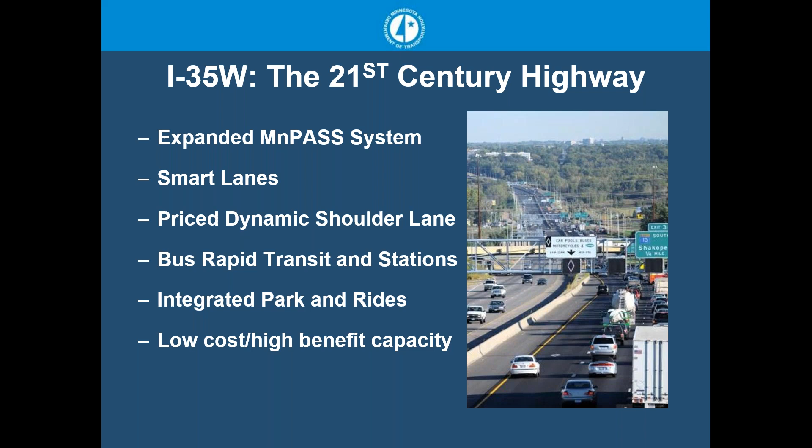This is another angle of our MnPASS lanes, as well as our active traffic management system with the lane control signals. The lane control signals were an important part of 35W, but also the dynamic shoulder lane section. We have intelligent lane control signals located every half mile over every lane. There are 297 of these devices total. We dubbed them intelligent lane control signals because they're actually a 4-foot by 5-foot full color matrix sign, which gives us a lot of flexibility to put any kind of graphic or text, and with the coloring, a lot more variability than just a standard lane control signal.

We use them primarily for incident management. We did have variable speeds at one time, and we use them to designate when the dynamic shoulder lane is open. Of the 187 lane control signals, the ones on 35W, there are about 20 that are within the dynamic shoulder lane section.

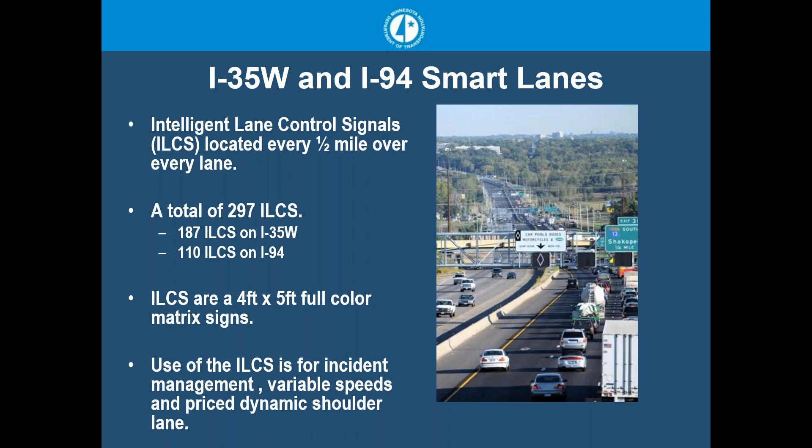These are some of the symbols you would see on the ILCSs, having different arrows notifying people when lanes are open or closed to traffic, whether it's an incident or road work. In the case of the dynamic shoulder lane, the motorist, as they're approaching, would see a merge right indication when the lane is closed, and then a red X over the dynamic shoulder lane throughout the extent of the corridor. When the dynamic shoulder lane is open, they'll see a green arrow.

We did add variable speed limits for a time. The speed limits were advisory only. They would detect traffic flows downstream, and then post a recommended speed up to 1.5 miles upstream. Like in the example in the picture here, we've got stopped traffic located just downstream, so we're starting to step people down to 50 miles an hour. The next sign might say 40, and then at the next location, that's when they actually start getting into that congested zone.

We ended up turning this system off a couple of years ago. It was in operation for about 5 years, having difficulties measuring some of the overall benefits of the system, but we were also identifying latency issues, mainly because of some of the detection we were using. We're using single loops with some Wavetronix. I think if we were to do it again, we'd probably go to full Wavetronix or some sort of radar sensor that would get us better and more timely speed data.

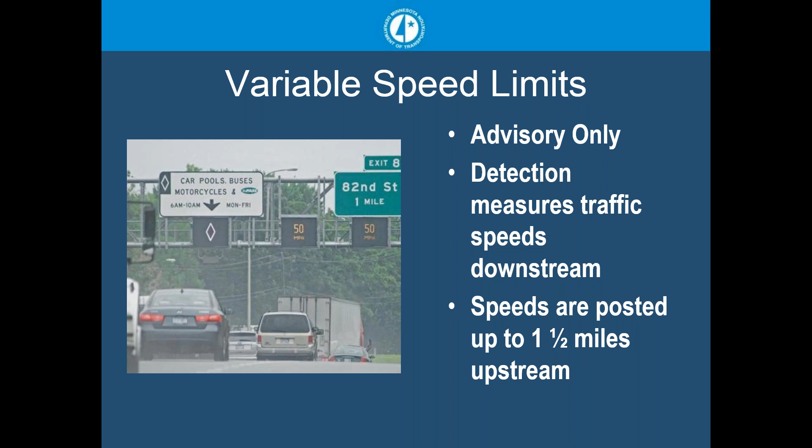Focusing a little more on the dynamic shoulder lane, as I mentioned, it was the last 3-mile segment of northbound 35W coming into downtown. This map is a blow-up of that particular area. You can see the downtown street grid on the north end, and it's also the major interchange with I-94. As you're coming north, the section highlighted in yellow at the bottom of the screen, that 5-lane section, was our area under reconstruction, a 4-year project that extended from about 2006 to 2010.

We added additional capacity and rebuilt the 35W interchange with Highway 62, adding that HOV lane that was being converted to an HOT lane. But if we had not done this dynamic shoulder lane, we would have had a 5-lane section going back down to 4. With the dynamic shoulder lane, or the PDSL, we were able to add that additional capacity and have 5 lanes all the way into downtown.

The cost of just the dynamic shoulder lane section, highlighted in blue, was $17 million, and that cost included rebuilding the right and left shoulders to be able to handle traffic, some additional catch basins so we would have less ponding in the shoulders, which were now a driving lane, and also the lane control signals and the gantries within this particular stretch.

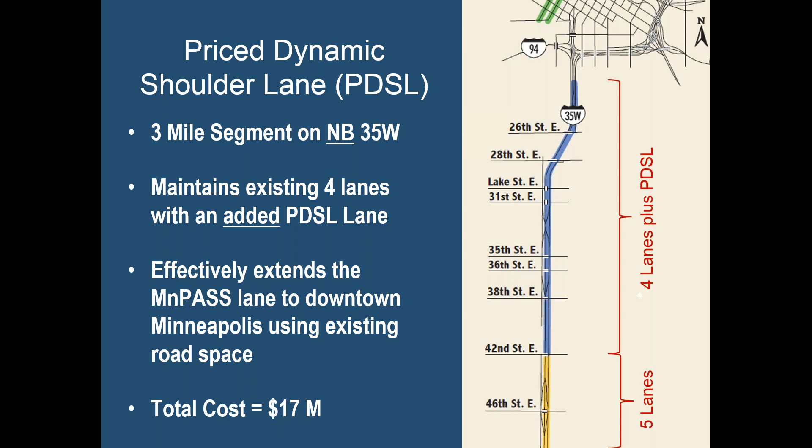This is more of a lane diagram showing the 35W priced dynamic shoulder lane. This map is a little bit tipped to the right from the previous one, where north, their direction of travel is to your right.

As you start on the left-hand side, you can see the 5-lane section with the HOT lane being the inside lane. We then have the 4 lanes plus the priced dynamic shoulder lane, highlighted in gray shading. On the north end, we essentially have 3 lanes that exit into downtown, and that exit happens on the left, with the 2 lanes that continue on to northbound 35W on the right. The reason why that's important and why I show this slide is that this is really what kind of drove why we put the dynamic shoulder on the left.

One reason was we could avoid all those entrance and exit ramps that you see on the side there. We didn't have to worry about trying to have any additional striping or signing through those interchanges, so we could avoid that for now, since this was the first time doing a dynamic shoulder lane. But it really was probably driven mostly by the split there on the north end on the right-hand side of the screen, with those 3 lanes going into downtown and only 2 going to 35W.

If the right lane ended up being that dynamic shoulder lane, when the dynamic shoulder was closed, it would effectively only give us 1 lane of continuity on 35W, and we didn't want that. We felt it was better to take away from the exit into downtown, because that would only be a higher volume during peak periods, which is when the dynamic shoulder lane would be open anyway.

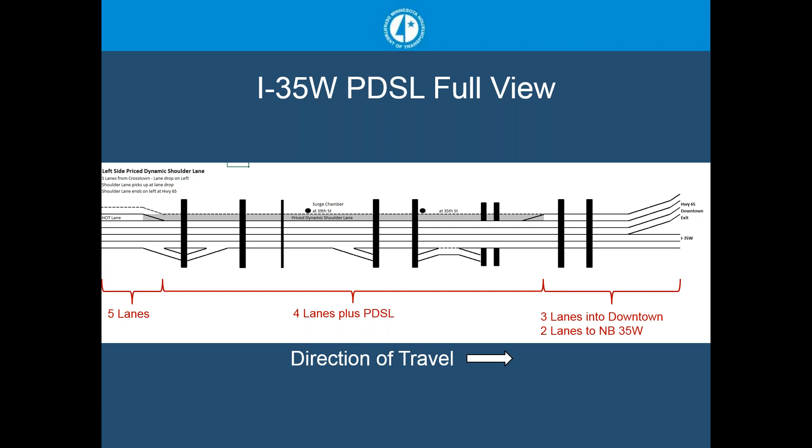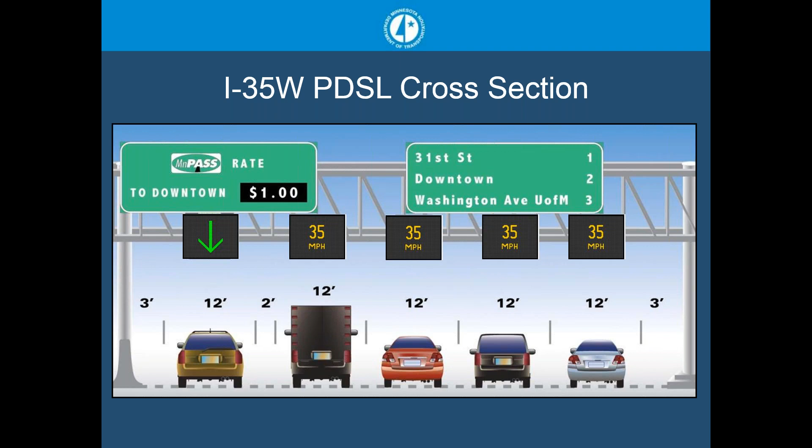This is just a typical cross-section within the area of the priced dynamic shoulder lane. You can see we were able to maintain 12-foot lanes. We shifted traffic to the right, so we took everything in terms of a right shoulder, so we only have 3 feet of right shoulder, a reaction area really. We have 3 feet of reaction area to the Jersey wall on the left side, as well as a 2-foot buffer between the adjacent general purpose lane and this dynamic shoulder lane.

The next image gives you a little bit better picture of how that looks. What really ends up happening is we've got that buffer separation on the left with that 3 feet, and then with the yellow edge line. Then we have kind of a secondary edge line, since it's really technically the left shoulder, separating between the general purpose lane and this priced dynamic shoulder lane. That buffer width that we would have between the general purpose and the MnPASS lane is really incorporated into that lane, so that 12-foot lane is really effectively a 14-foot lane.

Our hours are Monday through Friday from 6 to 7. We did originally have it from 6 to 10 and 3 to 7 to focus more on the peaks, but we expanded it during the midday just because of the high traffic volumes. We also were seeing a very high violation rate — probably a vehicle every 4 to 5 minutes or so using the priced dynamic shoulder lane when they should not have been. So we decided, rather than having a shoulder that created a false sense of security for folks, it was better to just leave it open during those times, but we still shut it down in the evening and overnight hours.

On the weekends, we at first had it closed, but we've gradually been expanding that, and we've expanded it to Saturday, and actually — got to update my slide — we've expanded it to Sunday recently, as well, as traffic volumes and congestion grow with special events and things going on downtown. We've seen a greater need to keep things open on the weekend as well.

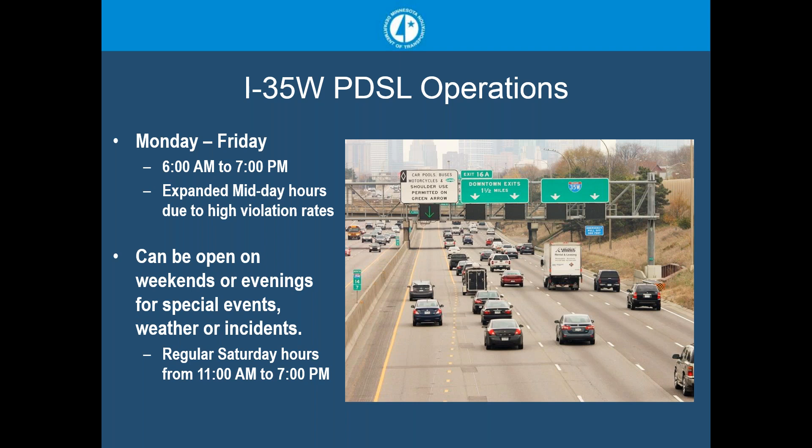But we did want to keep it relatively static, just so that it would avoid some driver confusion. The other thing we do is during snow and ice, for those in a northern climate, at the recommendation of our maintenance crews, we keep the lane open so that vehicles can help distribute the salt to break up the ice. Otherwise, the salt as it comes off the truck ends up in clumps, and keeping the lane open helps distribute that and keep the ice broken up. So they feel it's safer to operate that way rather than let the lane freeze up and then try to open it to traffic at 6 a.m.

It was better to just keep it open throughout the day and night hours. In terms of the signing, the sign over the actual dynamic shoulder reads that carpools, buses, motorcycles, and MnPASS are able to use it. So it's restricted at all hours of the day. It's actually written in state statute, because that was an agreement with the city of Minneapolis that this would be an expansion of the MnPASS and not an expansion of a general purpose lane. So anytime the lane is open to traffic, it's still restricted to MnPASS users and carpoolers, and that's why the signing reads as such.

The shoulder-use-permitted-on-green-arrow design was intentionally used because we wanted it as a condition that if for some reason we lost comm or power and the sign went blank, the default would be that we are not granting permission, so the lane would become closed. That was good in theory, maybe not good in practice, because we've had power outages due to thunderstorms that go through the area during the peak period, and those green arrows end up disappearing.

We've probably seen upwards of 60% of the traffic using the lane anyway, compared to what would normally use it on a different peak period.

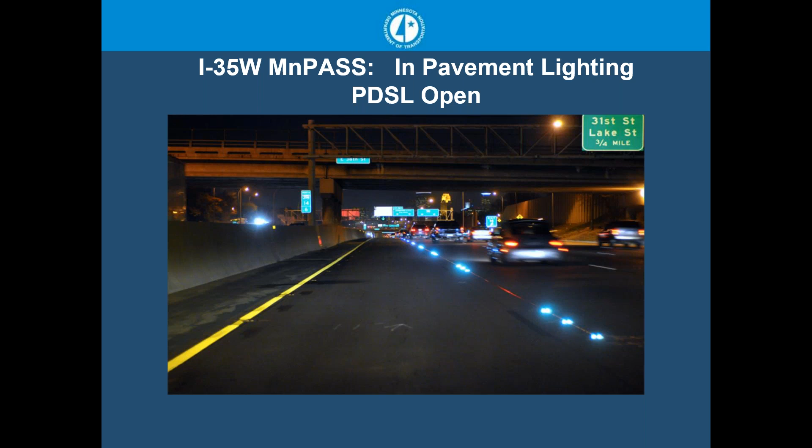So this worked well the first year. By the second year, we were starting to see corrosion. We were seeing that the lights were actually going out, and when we went out to investigate, the seals around the lights were starting to allow water penetration and salt in the wintertime, causing some corrosion inside, so about half of them went out.

We looked at replacing the system but opted not to, because what we found was that we ended up having to turn it off, and so many of them were out anyway, that we weren't seeing a distinguishable difference in our violation rate, both with or without the lights. So it didn't seem worth investing in the system to replace it. What we probably would have done differently is we found that some of the devices that were actually sealed more than what the manufacturer recommended survived better, so we probably would have done more sealant.

We probably also would have looked at doing more of a conduit system to run the cabling for power and comm, as opposed to saw cutting it in. Then it would have been less susceptible to the movement of the pavement, but also would have allowed us to run new cabling. That was a challenge because there wasn't enough additional slack to reestablish the connections due to corrosion. We would have had to run all new cabling, so we opted not to deploy it again.

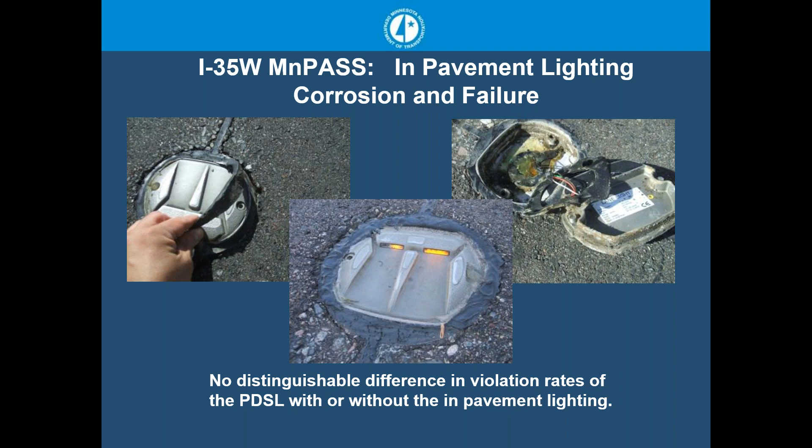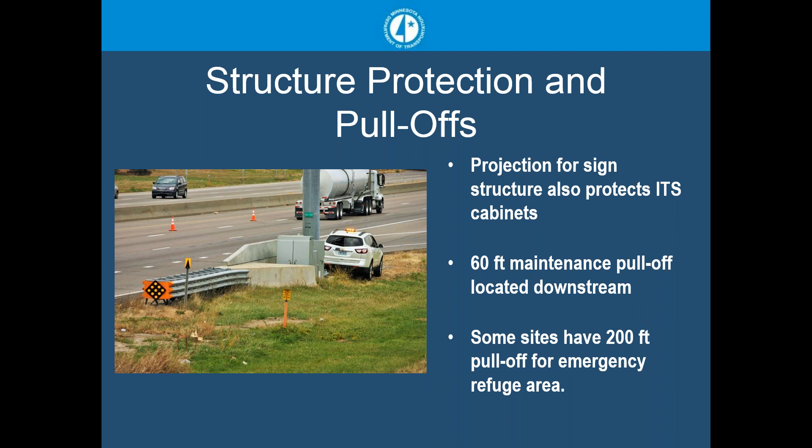As far as the structures and the pull-offs, this is true of the entire corridor, not just the dynamic shoulder. We built this type of protection for the sign structure, which also helps protect the cabinets. It also created a 60-foot maintenance pull-off area, which you can see the SUV parked in. It's about a 60 by 10-foot pad, and the maintenance vehicle is able to pull behind that and gets protected from traffic by the barrier protecting the sign structure. Some sites where we had room, we extended that maintenance pad to 200 feet to allow for an emergency refuge area for stalls and crashes. And within the PDSL section, we extended that 200 feet to 800 feet.

I'm going to skip ahead here a little bit.

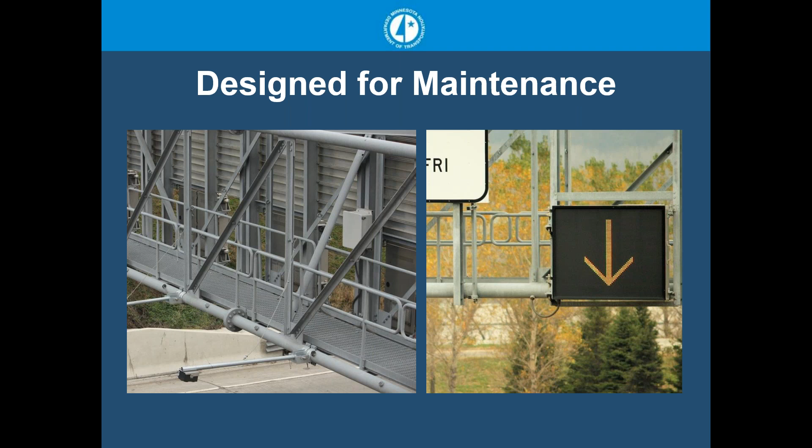Here's a little bit more on the design. We have catwalk structures that allow us to maintain the devices overhead, and the signs themselves will actually pivot. If you look on the left hand of that sign displaying the yellow arrow, you can see the hinges, and that sign will pivot like a door and flip backwards so that a maintenance worker can work on the front of the sign from that catwalk structure. That also helped during testing, because when we first installed them backwards, we could test them without them being visible to traffic since they faced away from it.

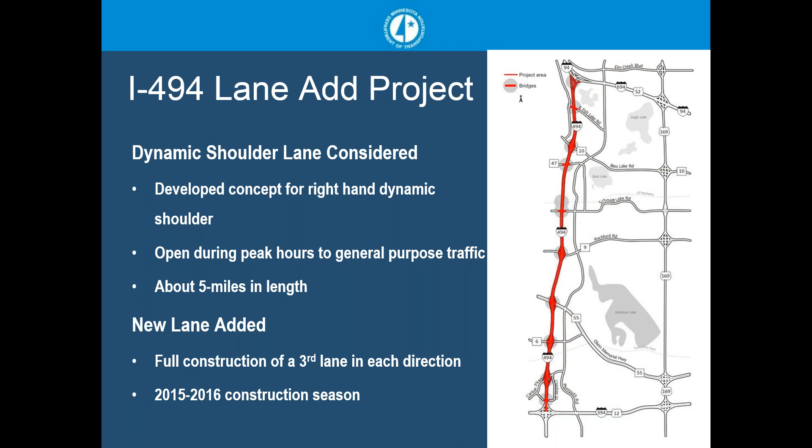So I'm going to wrap up here with some lessons learned and what we would carry forward into another project that we developed but never actually constructed. We looked at a dynamic shoulder lane on 494, a 5-mile stretch that was going to be a right-handed dynamic shoulder lane going through interchanges. At the end of the day, it was determined that this alternative did not win out against doing a full reconstruction of the third lane in each direction, and that was actually constructed over the 15 and 16 construction season as a full new lane.

Had we done the dynamic shoulder lane, the things we would have done differently from 35W: we looked at doing a dynamic insert within the static sign, as opposed to having that individual lane control signal underneath, to help reduce costs and make it more of a lane control signal rather than a dynamic message board. We were going to only display those over the shoulder, not having lane control over each general purpose lane, and probably just doing more of a cantilevered structure as opposed to the larger sign bridge, in an effort to reduce costs.

We also looked at having more advanced notification. On this corridor, it would have been an exit-only lane extending up onto the dynamic shoulder, so we would have a dynamic portion underneath the static sign indicating the exit, showing either exit only or blanking out entirely to show when the lane was either open or closed.

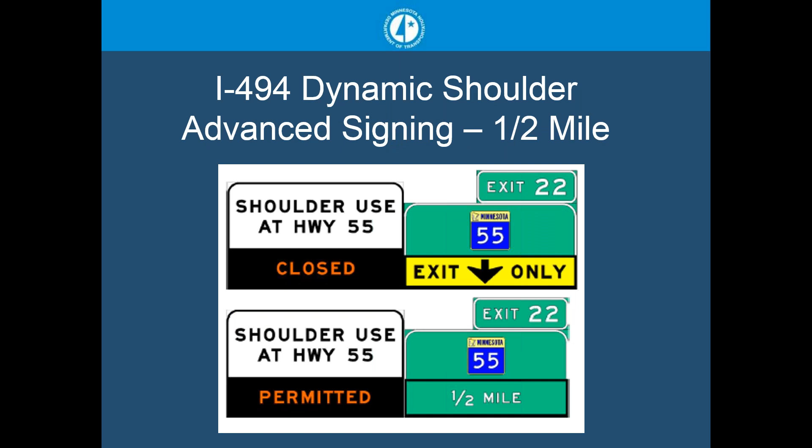So this would have been 1 mile away, and as you got closer, this was a half a mile away. We would add an additional sign that would say shoulder use at Highway 55 and whether it was closed or permitted. And then at the actual point where the shoulder lane was going to start, or just shy of, we would have this sign that again would give that indication that the shoulder use was permitted, and whether or not you would either have to exit only or it was just a standard exit.

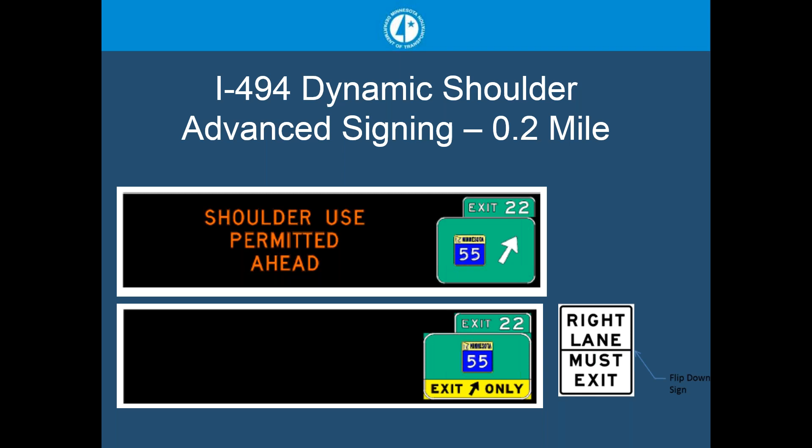We really focused more on advanced warnings, so you can see we scaled back in terms of the number of signs within the actual dynamic shoulder lane, but wanted to have a lot more advanced notification to give people warning that there was a change ahead. We were also looking at some watch-for-traffic-on-shoulder signs for traffic entering from the ramps.

So with that, in closing, as far as dynamic shoulder lanes go, we have nothing planned. 494 didn't happen, as I said. It got constructed as a full lane, but it's still a tool in the toolbox. And then on 35W, the dynamic shoulder lane will actually end up getting replaced with a permanent lane starting in 2018 and opening up in 2022.

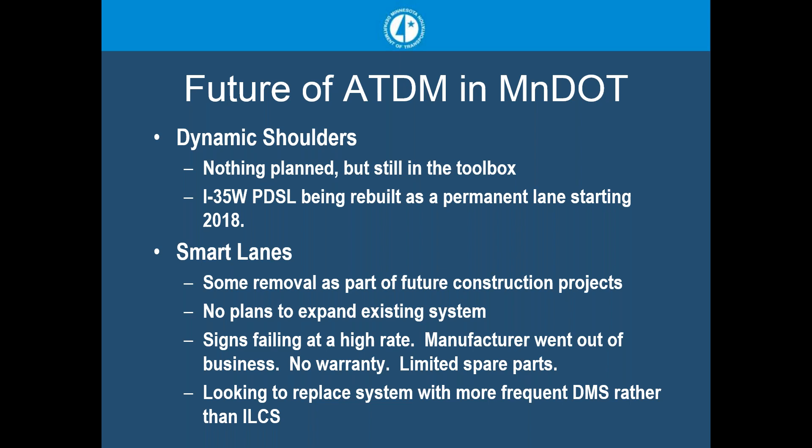We're actually starting to look at our smart lane system, doing some removals over the next couple of years because of the high cost to operate and maintain the system. We've had some issues where the manufacturer went out of business, so we have no warranty and limited spare parts. So we're actually looking at replacing the system with more frequent dynamic message signs rather than doing the intelligent lane control signals over each lane.

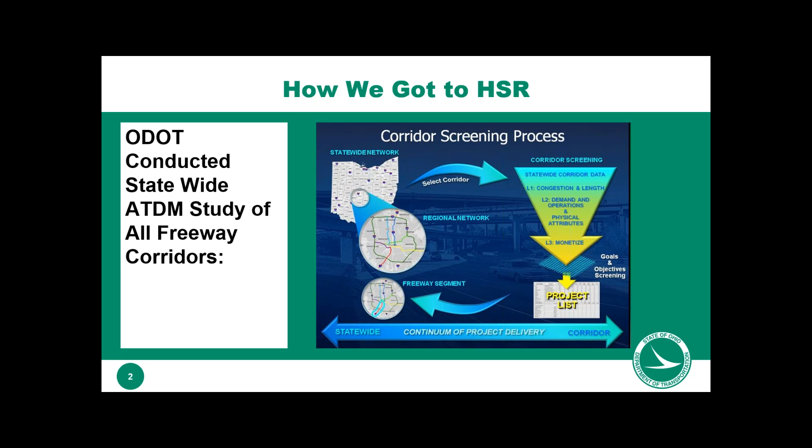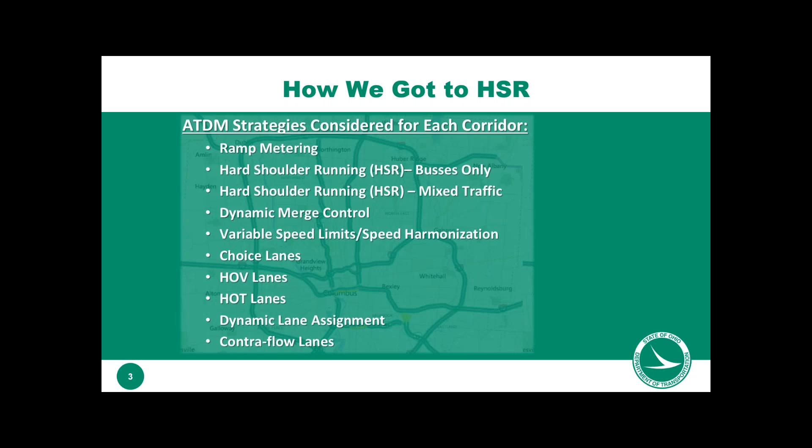So how did we get here? A couple of years ago, Ohio did a statewide ATDM study, and we essentially looked at every corridor throughout the state, looking at a number of strategies, and in the end there was a report that assigned, based on benefit cost, what strategy would work best for each corridor.

We decided that one of the things we really wanted to try that we hadn't is hard shoulder running, and we boiled it down to one of 4 corridors. 3 of them are on the left in Columbus, and the one on the right is in Cincinnati, on the outer belt around Cincinnati. We ultimately picked the 670 corridor for a couple reasons.

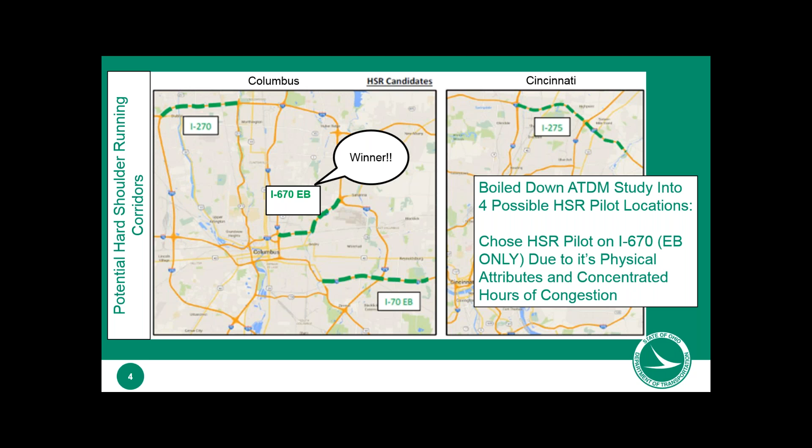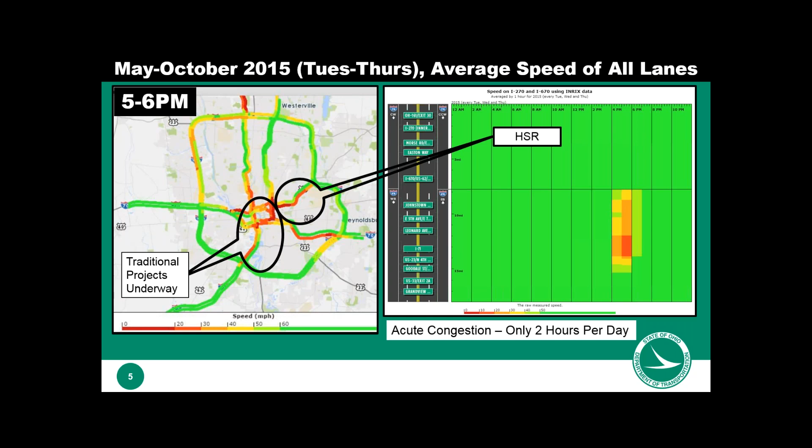The first reason was the physical cross-section was quite wide, so we had a lot of room to work. But more importantly, maybe, was the traffic characteristics. This is a congestion scan, and it shows congestion on 670 eastbound is very much focused to just a 2-hour period from 4 to 6 p.m. So the other 22 hours of the day, everything's fine - it's just during those 2 hours that we needed the additional capacity. So we thought hard shoulder running would be a very good application here.

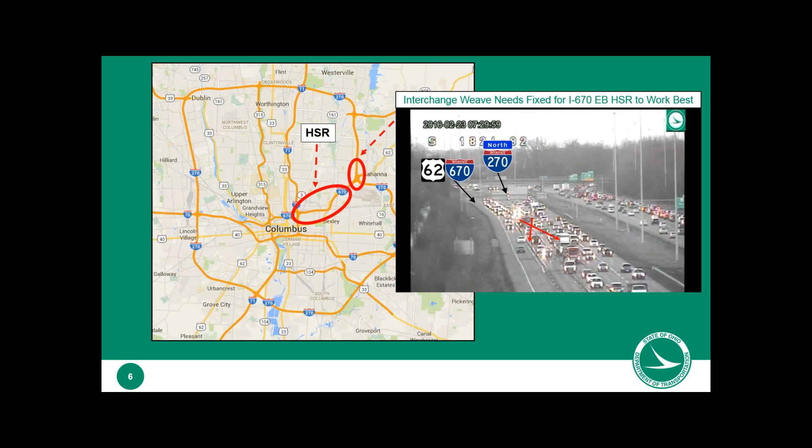On top of that, you can see on the left where the hard shoulder running corridor is, but it was dumping into 270. Now we have an existing problem on 270 with a weave, as you see on the right. So we made a decision that we had to fix the weave anyway, so we've actually bundled it into one project, and we think it's going to make the hard shoulder running much better.

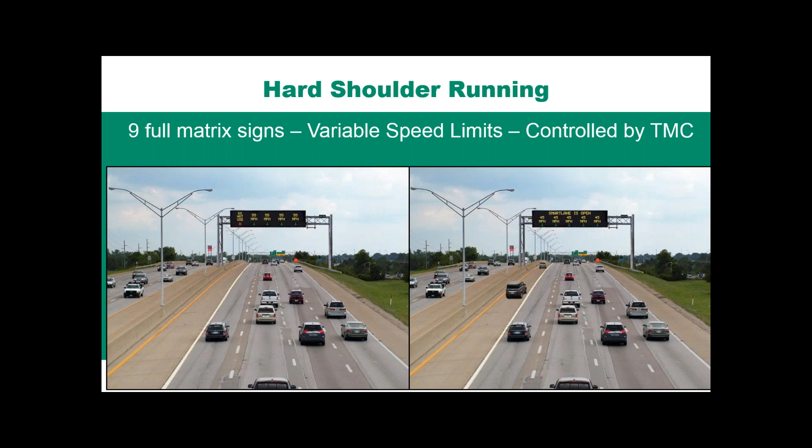The system essentially is going to be 9 full matrix signs on gantries across the road. We went with full matrix signs because we thought that gave us a little more flexibility for using the gantries in the hours that we weren't running the hard shoulder running.

Some of the challenges: we had to shift the lanes a little bit in part of the corridor. We had a 12-foot shoulder on the right-hand side, and we took 2 feet of that away, resulting in this lane width. What's nice is we still have our minimum 4-foot offset to the median barrier on the left, but we're still able to provide a shoulder for emergency pull-offs and access for emergency vehicles on the right. So the wide existing cross-section really worked out for us.

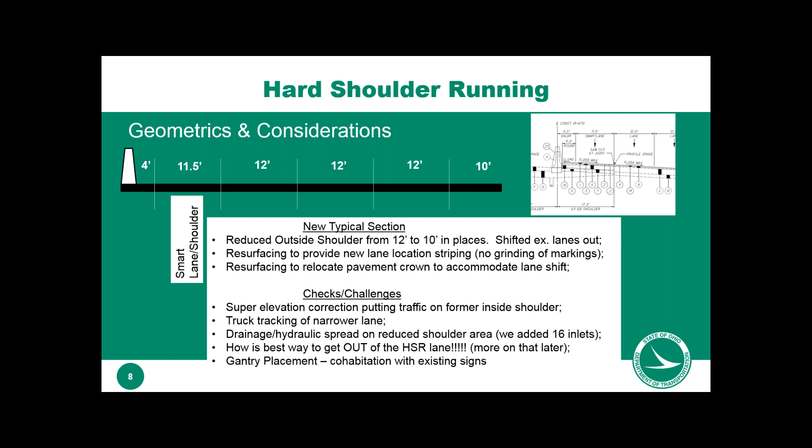We also had to add 16 inlets for drainage purposes. But one of the biggest challenges was trying to figure out how to get out of the HSR lane. It's pretty easy to get into, but getting out really required some thought.

Here's our costs. From a HSR standpoint, it's about $13.5 million. The top cost of $35 million was to get rid of the weave problem that we were going to have to fix anyway. The $3.5 million for bridges is completely unrelated to the hard shoulder running, but there are several mainline bridges that needed rehabilitation within the planning horizon of this project, so we just incorporated it. So the grand total is $52 million, but the reality is only about $13.5 million are related to the hard shoulder running directly.

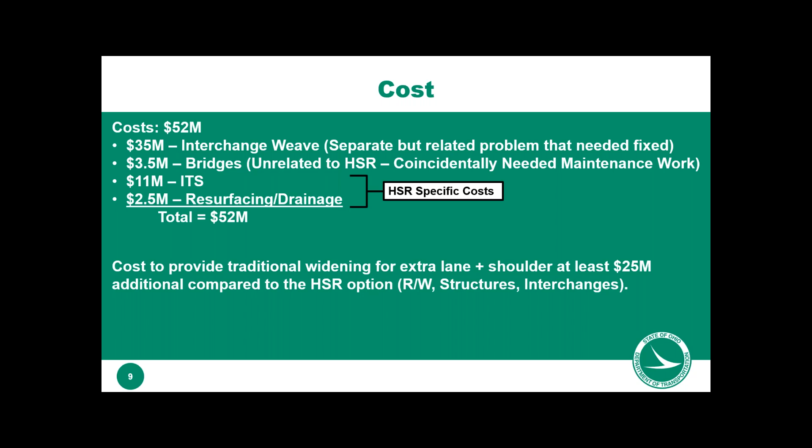We also did a very quick cost estimate of what it would have taken had we done a traditional widening, adding another 12-foot lane and another 10-foot shoulder. The delta between our hard shoulder running project and that was about $25 million.

What's nice about that is we're able to provide the capacity only in those hours when we need it, 4 to 6 p.m., and then the other 22 hours of the day, we still have a shoulder on the left-hand side. So we think it's a very economical thing, saving that $25 million, being able to meet the capacity demands, but also for 22 hours of the day, providing the emergency refuge on the left-hand shoulder.

The modeled travel time savings is 33 to 45%. By keeping everything in the median, we avoid all the interchanges, but we also keep from pushing our footprint out, avoiding neighborhood impacts and impacts to the numerous interchanges throughout the project area.

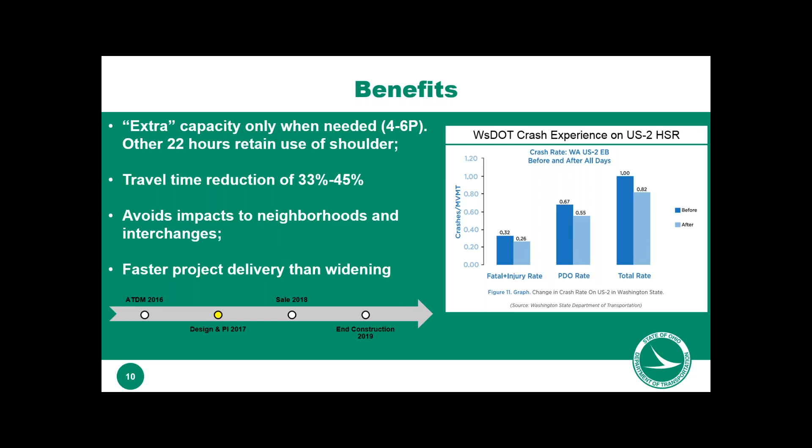The other really beneficial thing is the HSR project didn't start design until early this year, and it's scheduled to be filed in February of 2018. So basically a one-year time frame from when we decided to start design until the time the plans are filed. So we could deliver this project much faster and address the congestion issues that we have out on 670.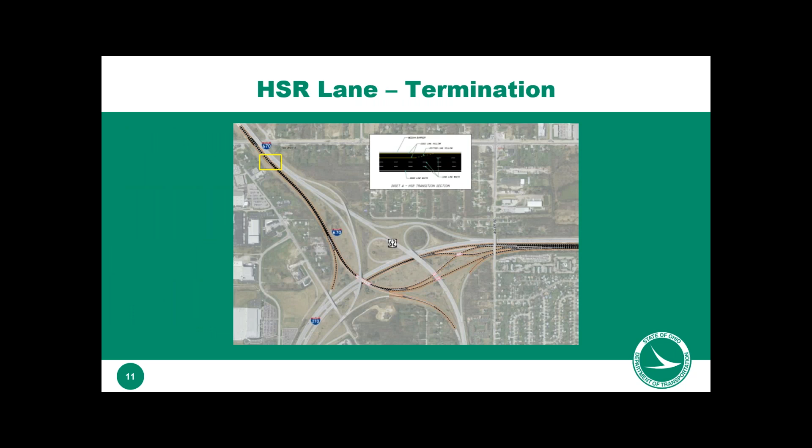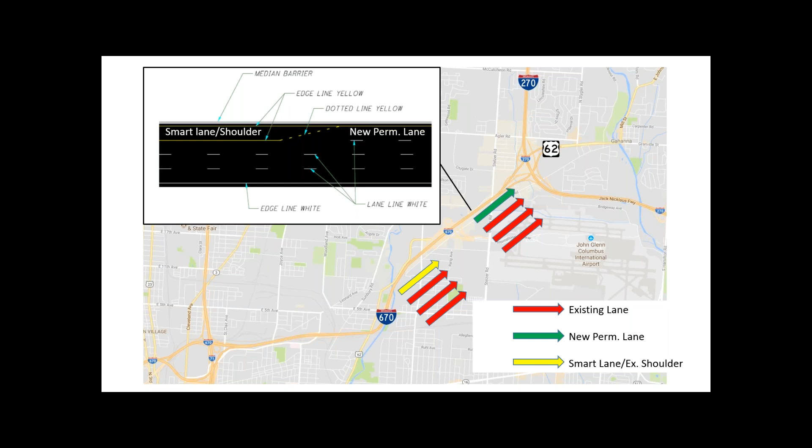This is actually the location of the last overhead gantry showing people if the shoulder lane is open or closed. So if you're in one of the left-hand lanes, when you get to this location, if the hard shoulder running is closed, then you can move over into the new lane. Obviously, if the lane is open, then you need to stay in your current lane.

Public involvement has been quite extensive. This is new to Ohio, and it's not that common anywhere. So we've got a lot of public involvement with local officials, our transit agency, which is currently using the shoulder for bus-only shoulder use, plus our NEPA public involvement. One of the other things we've been working on a lot is enforcement, as well as emergency response, because they have some concerns about losing access to the left-hand shoulder for the two hours during operation.

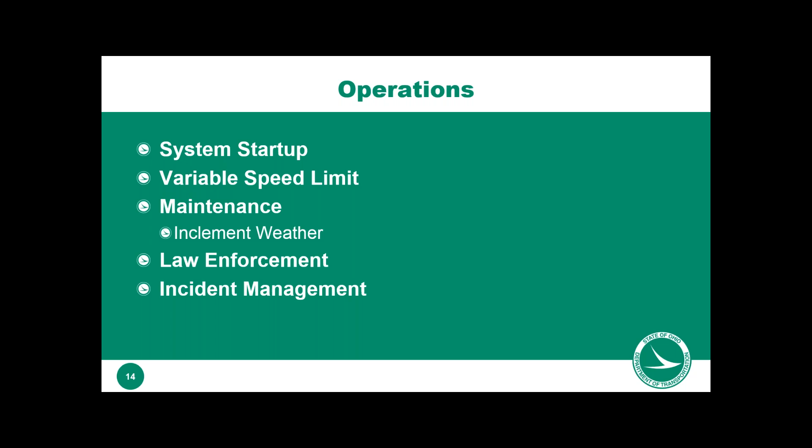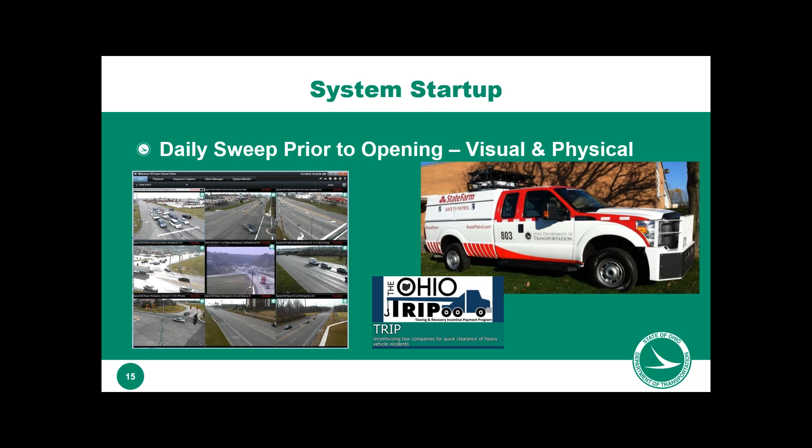A little bit about how we think we're going to be operating the system. Opening up, we have a dedicated freeway service patrol who will do a physical inspection of the shoulder, as well as we've installed additional cameras that will provide us 100% video coverage of the hard shoulder running lane.

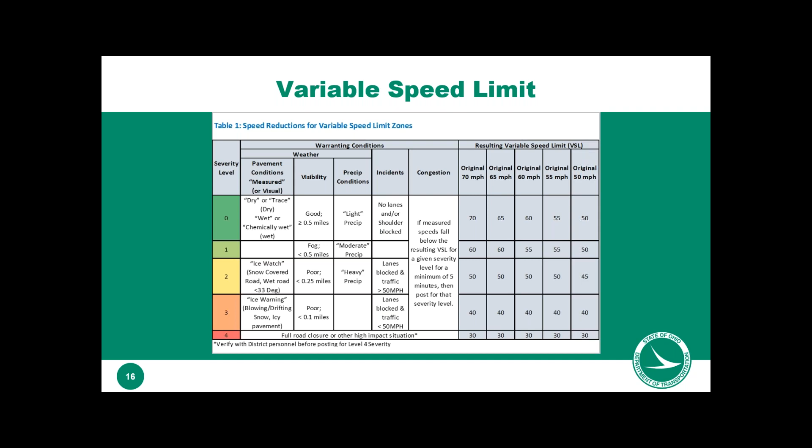We are using variable speed limits. One of the things is it kind of reconciles the geometrics of what we have out there with the speed limit when it's open, so we are going to use variable speed limits. VSL is fairly new to Ohio. We just received enabling legislation within the last year, so this is the policy not only for the hard shoulder running lane, but for other variable speed limit installations around the state.

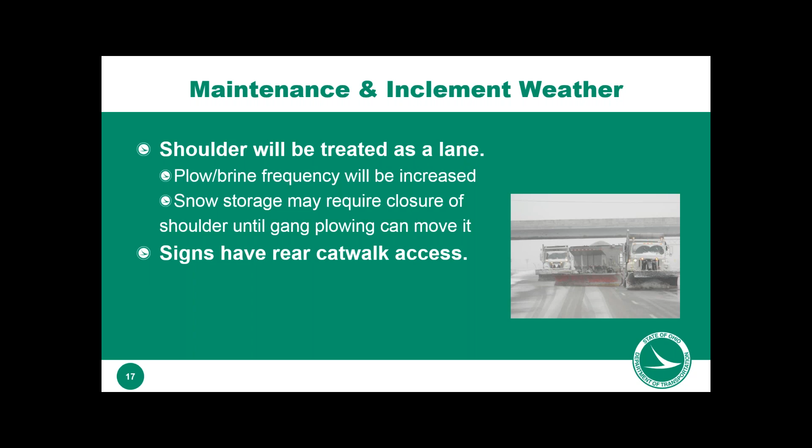Maintenance is a big concern. Columbus does get snow, not as much as Minnesota certainly, but it is an issue. So we've been working with our county to come up with a plan to handle snow and ice. Essentially, if we can't get the lane treated and open and keep it operationally safe, then on those days we just won't open it. In the few times that may happen, we're just back to the same situation we're in now—we have the same number of lanes that we do today.

Law enforcement, as I said before, a lot of coordination, a lot of concern from them. But also not only from access, but from their ability to enforce, with the variable speed limits specifically. So we're being very careful to make sure that we log all of the speed limits as they go into effect for purposes of ticket enforcement.

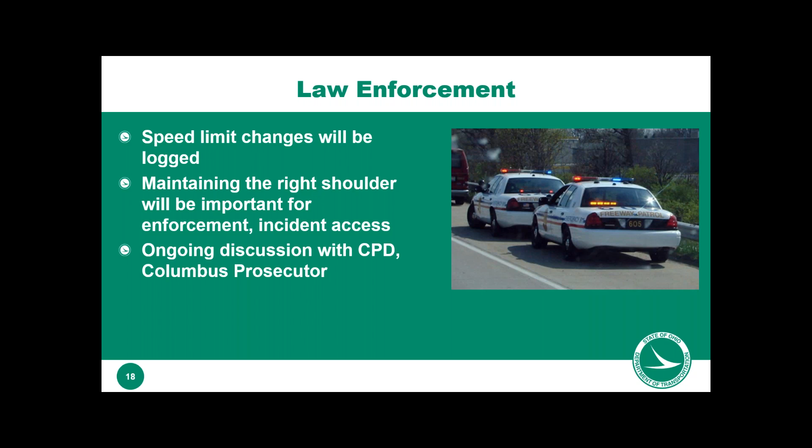Right now we're planning on just operating it from essentially 3:30 to 6 o'clock. Like Minnesota, if the conditions warrant it, we may open it up a little bit earlier, may close it a little bit later. But the thought was, as a new thing to Ohio, we wanted to keep it as close to fixed time as we could for driver expectation.

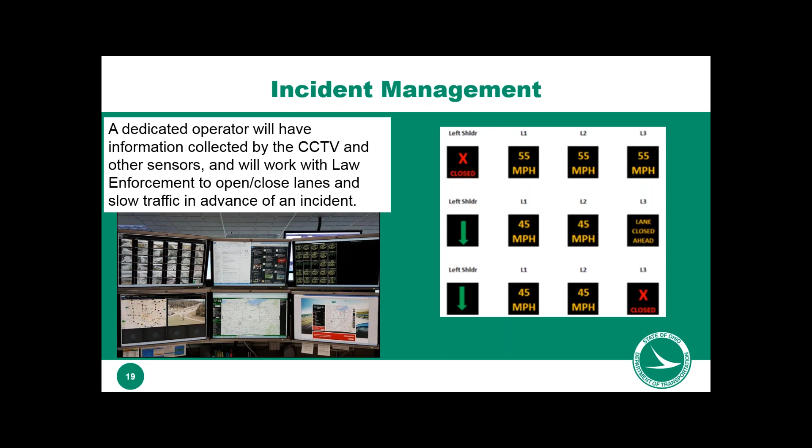Not having operated one of these facilities, we're planning on dedicating a full-time TMC operator to the operation of this, to work with and ensure that it works. We may scale that back, but that's just one of those things you kind of learn through time—how much resources this is going to take in our traffic management center. And that's pretty much it.

Ohio's first HSR lane, or smart lane, will go to construction this summer. We have an interim completion date. We should start operation either the end of middle of next year or fall of next year, probably more likely. So with that, I'll turn it back over.

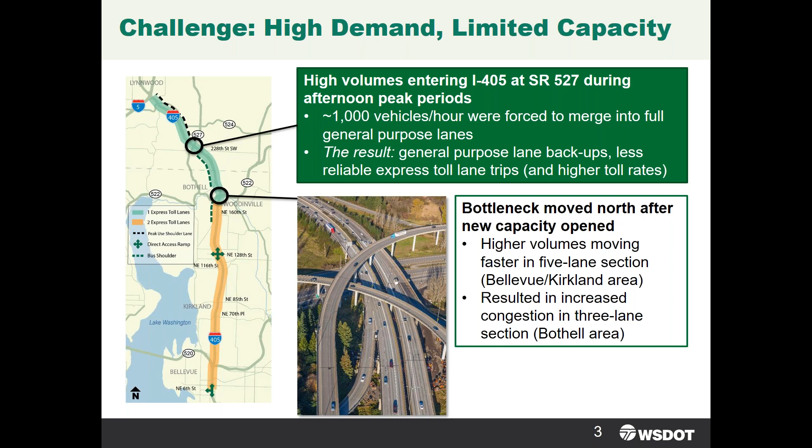Specifically at the last interchange going northbound, it was a very high volume interchange where we had about 1,000 vehicles an hour entering the freeway. Before the toll lane project, there was capacity where they could find gaps reasonably well. After the toll lanes and more traffic flowing through the area, those lanes were basically full, so drivers had no gaps to find, which created some of the congestion we saw afterward, and we needed to find a solution.

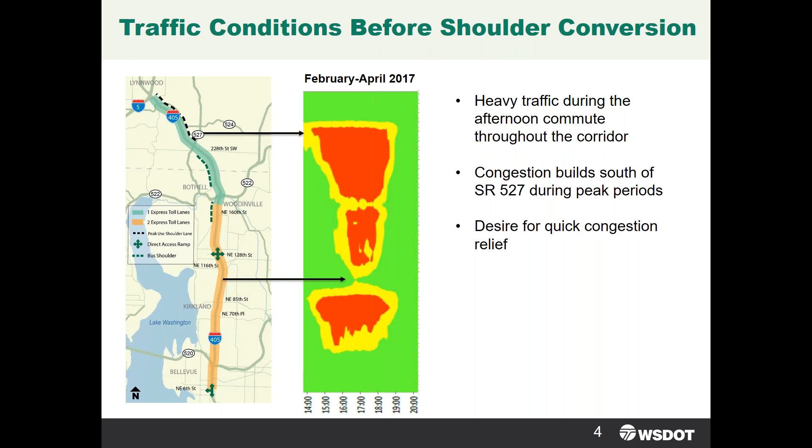Looking at the traffic conditions, we have a traffic heat map to show this. Before the peak-use shoulder lane was implemented, you can see we had upwards of almost 7 miles of congestion going northbound in the afternoon commute. This was building from the on-ramp at what we call the SR 527 interchange, which was at about 1,000 vehicles an hour. So once the toll lane project was open, there was a quick desire to figure out what we could do to solve this additional congestion before the bottleneck moved further north.

So what we settled on, looking at what we could get out there the fastest and most effective way to address that challenge, was implementing a peak-use shoulder. We ended up converting the right shoulder of an almost 2-mile section on the very north end of the corridor, between 527 and I-5, into a dynamically controlled general purpose peak-use shoulder lane. There were previously planned peak-use shoulder lanes in the Puget Sound region, but none had actually been implemented at that time, so this ended up being the first peak-use shoulder lane that WSDOT implemented.

During development of the project, it required an extensive amount of stakeholder outreach, being the first of its kind, setting the criteria for what we needed to implement. That involvement included a lot of coordination with State Patrol and WSDOT signal maintenance, looking at the refuge areas and maintenance pullouts, giving them options like how much impervious area we could add, what's the best place to locate these, and how to coordinate the emergency pull-offs with maintenance needs to get the most effective use of the pavement we added.

We also coordinated internally within WSDOT traffic and tolling divisions to determine the design of the system and the concept of operations, and how it would function, along with how to build the system while maintaining the express tolling system operating at all times. We also worked with Federal Highways and local cities, with Federal Highways helping develop the highway safety manual analysis for the project, analyzing it as a peak-use shoulder and determining the right cross-section.

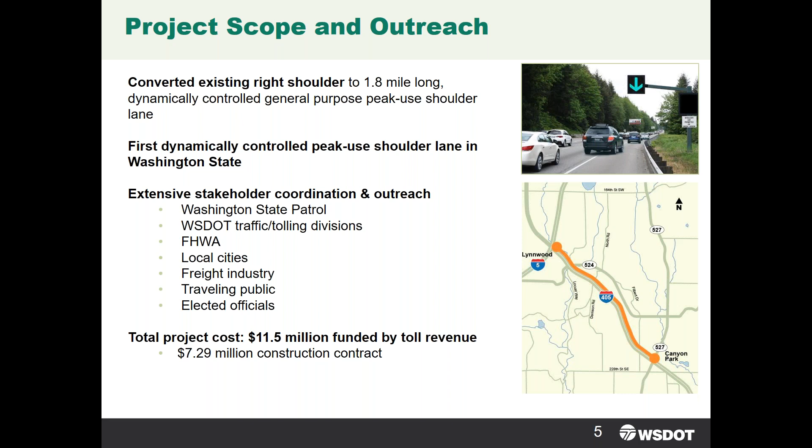Finally, with elected officials, this was a very high profile project. It was brought up in one of the gubernatorial debates, and the governor attended some of the early project events, actually pressing the button to turn the system on the very first day. The project cost ended up being about $11.5 million total, all funded by toll revenue, with a little over $7.29 million as the actual contract amount as part of a design-build contract.

So what we ended up building for the element: in developing the system, we ended up doing 4 overhead signs, spaced about half a mile apart. We matched other corridors that had ATM systems, so that was consistent with the ATM system spacing, as well as going with a 5x5 lane control sign.

We located them so generally you can always see a sign as you're traveling through, to know if the shoulder is open or closed. One other thing we added, which you can kind of see on the side of the GIF, was a supplemental message on the side so we could add additional queue warnings and convey some additional messages to the traveling public.

Finally, we ended up with basically 4 emergency pullouts, coordinated generally around access points for the express toll lanes, but also at different peak-use shoulder lane control signs to allow maintenance the opportunity to pull off and maintain them while the peak-use shoulder was up and operating. As part of the project, we also ended up building about a quarter-mile long noise wall that was determined to be needed when we went through the NEPA process.

For striping and delineators, we ended up not doing a second edge stripe. We started out when we opened the project with just a single edge stripe between the outside general purpose lane and the peak-use shoulder lane. After opening and monitoring some of the traffic, there were a couple of spot locations where we ended up supplementing with an edge line, in one corner where we were seeing cars drifting a little to the outside, and near some guardrail terminals, to provide some added delineation for the traveling public when there's something on the outside condition coming up.

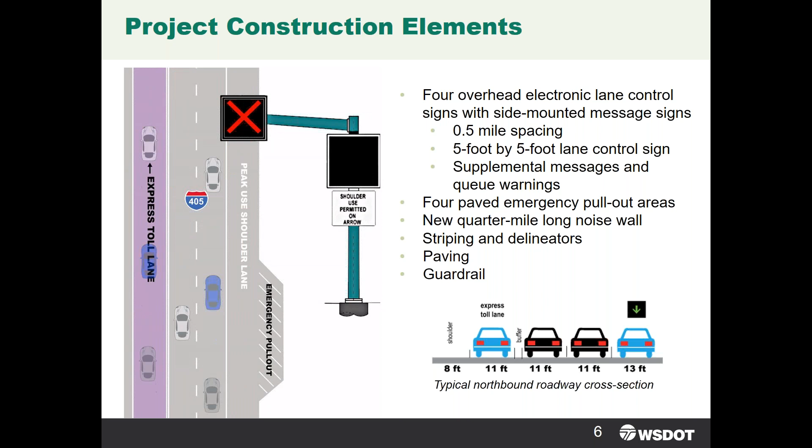For the project cost, as I said before, it was a total of about $11.5 million. For the breakdown, since it was a design build, it was a lump sum contract amount, but looking through some of their price-loaded schedules, generally about $3 million of the contract was for the peak-use shoulder elements, for the actual electronics, some of the paving, the emergency pullouts, and the striping.

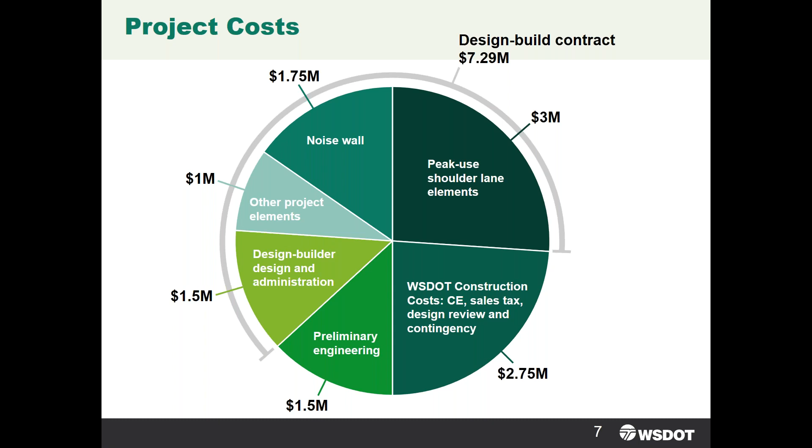The noise wall ended up being a little less than $2 million. There's about $1 million of other express toll lane adjustments done in other parts of the corridor that weren't related to the peak-use shoulder, and then another $1.5 million for the actual design builder design and design builder administration costs.

For the timeline, as I mentioned before, it was very high profile, and everyone wanted to get congestion relief out to the public as soon as possible. The project was identified in March of 2016 — that's when the legislature said go do this project — and we actually opened the project a little over 14 months later, at the end of April 2017.

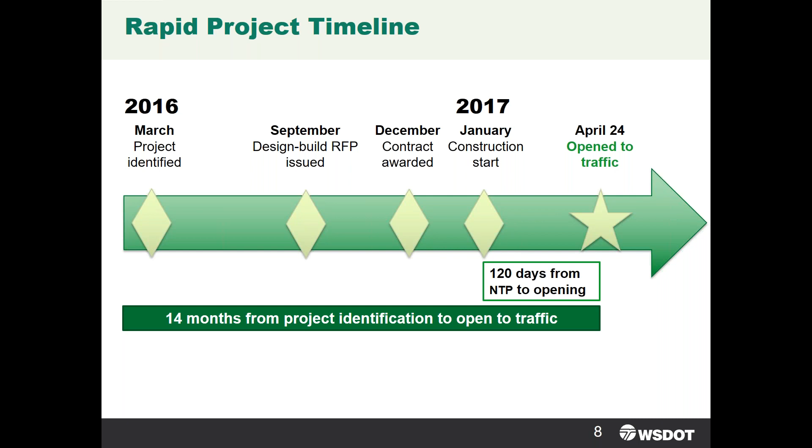In the first 6 months, we went from identification, worked through the concept of operations, and developed the design build RFP. We awarded the contract at the end of the year. They started construction in January, and they were open to traffic 120 days later.

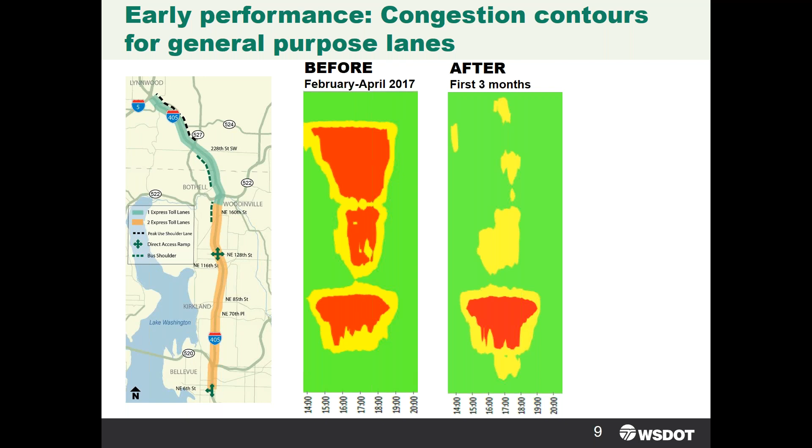If you look at the very top of the after condition, you can see that yellow section there. We did move a little bit of a bottleneck downstream. That was expected, and at some point the lanes end and you run into an interchange. So we were facilitating some traffic moving through a little quicker, but all in all, pretty big performance benefits in the general purpose lanes.

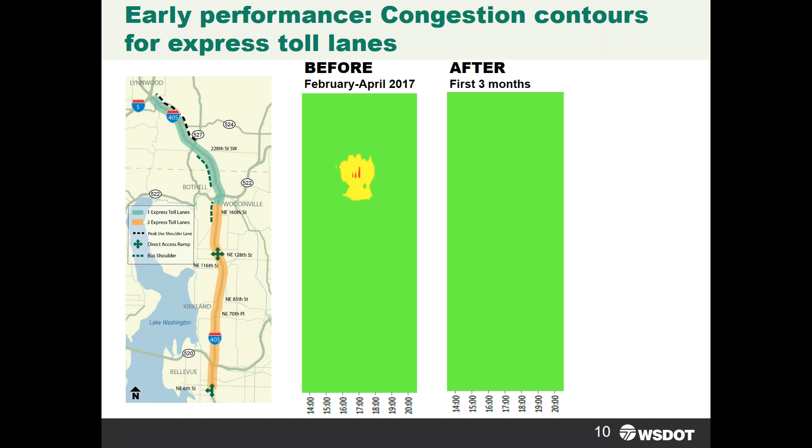If we look at the express toll lane on the left side of the buffer there in the same area, we had some congestion in the before condition that was in and around an access point, and also related to really slow performing GP lanes. In the after condition, with those general purpose lanes moving a lot better, we saw the express tolling performance tick up to essentially free flow speeds all the time.

This chart on slide 12 shows week over week, for the first several months, what the volume and usage of that peak use shoulder lane was. Week one, we had kind of limited use over this 5-hour period. By week 2, and definitely week 3, we had full use. Very, very quick adoption—people figured it out and started using it. A lot of that, I think, is related to the good outreach we did in advance.

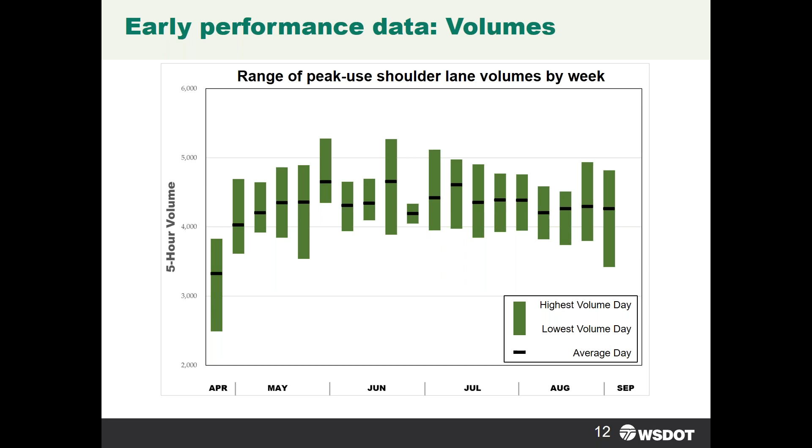We had a lot of television coverage in addition to the social media stuff that Barrett talked about. Since then, there's a lot of variability in traffic day to day, but the use of that lane is pretty consistent and has been pretty high.

Incidents: we took a look at the incidents over the first 5 months of operations, and we had 11 incidents. We looked at them in detail. We had 4 collisions, 6 disabled vehicles, and 1 unclassified. Really, as with all crash analysis, it's hard to make any determinations or identify any trends on such a small sample period. But we didn't see anything that really stood out. This is consistent with generally what we're seeing in the corridor.

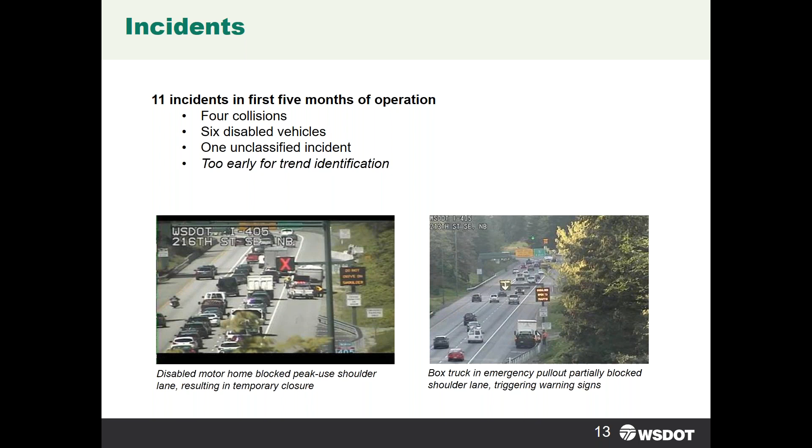I will note that when we did have incidents, when we closed the lane, the red X is up, we told people to move out. We had really good compliance, and so we felt very good about that, in that this was the first dynamic shoulder lane that we had in Washington State. It was something new, but the compliance was very good when we did have to close it.

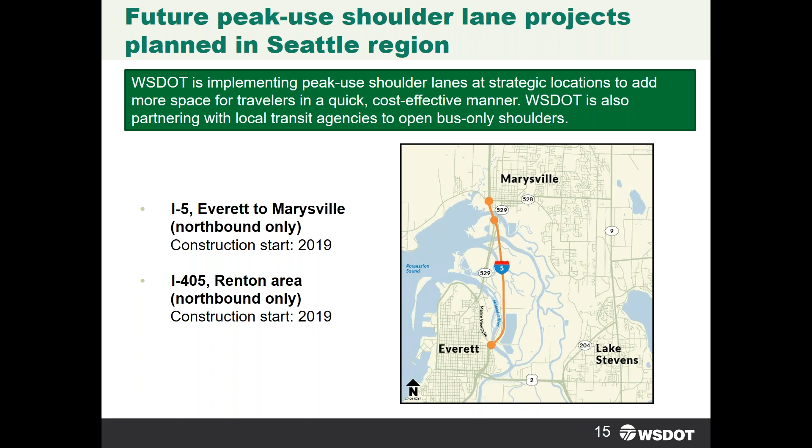Looking at the future, there are some other peak use shoulder lane projects planned in the corridor. It's a tool in the toolbox—not the right solution for every location, but at very select locations, it can be a great tool to utilize. You see a couple further north on the I-5 corridor, and another part of the 405 corridor, where we plan to implement them around the 2019 time frame.

So we want to talk a little bit about some of the lessons learned, from the design perspective, as well as just the implementation and outreach perspective.

Looking back on it, one thing I mentioned earlier was about the added delineation. After we opened the system, we went back and added some additional delineation. I think not having that second edge stripe out there has helped with some of the off-peak time compliance. If it doesn't look like a lane, it just looks like a normal shoulder. But we were smart about where we added the delineation, around some guardrail terminals.

And then some curves where people were kind of off-tracking that we didn't want them to do. As we mentioned a couple times, that early stakeholder coordination was definitely key to the timeline we got out there and the success of how we opened it.

Involving everyone early on, including maintenance and state patrol, working through to set the criteria for the project, and giving them options - for an enforcement area, is it better to have 3 smaller pullouts strategically located, or 2 slightly bigger ones, where we could fit both options within the environmental footprint.

Just giving them the option of saying what works best for them, I think helped gain support from those different agencies as well. And then from an implementation and outreach standpoint, the public outreach of educating the traveling public, doing some visualizations and renderings, since a picture says 1,000 words, helped the traveling public understand it. It also helped with earned media, having newspapers and TV stations pick it up and put a picture on their website instead of trying to explain it in text.

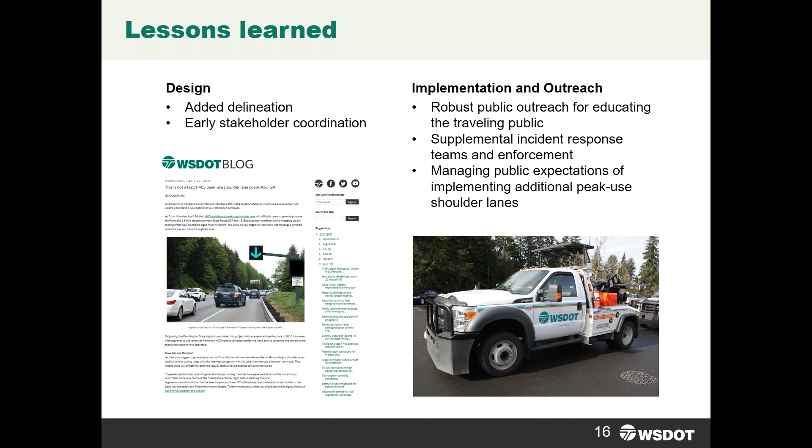And finally, the downside of the clear communication and message for public expectations was there's been some feedback of, well, why can't you do this in different locations, or why can't we just open it 5 or 10 minutes early. Trying to understand there's more than just flipping a switch that goes into operating a peak-use shoulder lane - the Traffic Management Center is monitoring the whole Puget Sound region, not just this 2 miles of 405, and there's a process we have to go through to make sure the lane and shoulder are clear of debris before it's ready to open.

So that was our presentation, and I think we've had a very successful opening and implementation of the first peak-use shoulder.